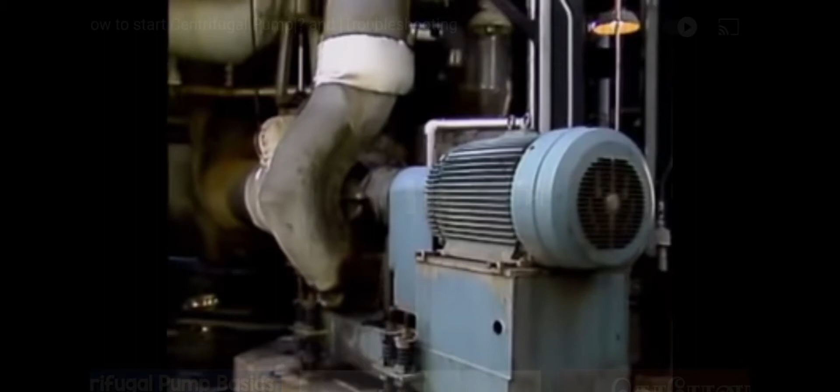Plants use many different types of pumps. One of the most common types of pumps that plants depend on is a centrifugal pump. Centrifugal pumps use centrifugal force to move process liquids.

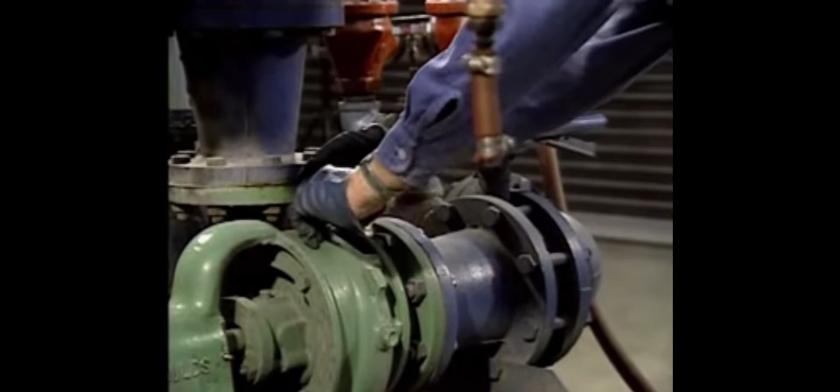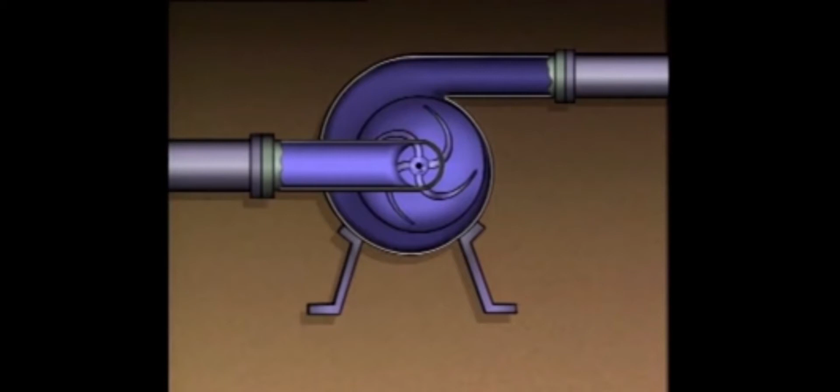One basic requirement that affects the operation of all centrifugal pumps, large or small, is that they must be primed. In other words, the pump casing and suction line must be completely filled with liquid before the pump is started. If a centrifugal pump isn't primed, it won't operate properly. Some centrifugal pumps stay filled with liquid when they're shut down. These pumps are often called self-priming pumps.

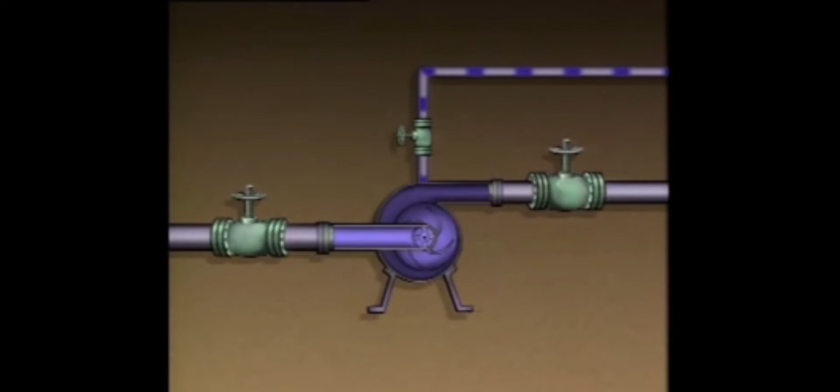A common way to prime a centrifugal pump is to open the pump suction valve and the vent valve. Opening these valves allows liquid to fill the pump and air to escape. In order for this to work, however, either the level of liquid to be pumped must be higher than the casing of the pump, or the suction pressure must be great enough to force the liquid into the pump. If the pump is handling a hazardous liquid, the casing vent should be piped to equipment that will prevent the escape of hazardous liquids. If the liquid level is below the pump casing or the suction pressure is too low, a variety of devices can be used to prime the pump.

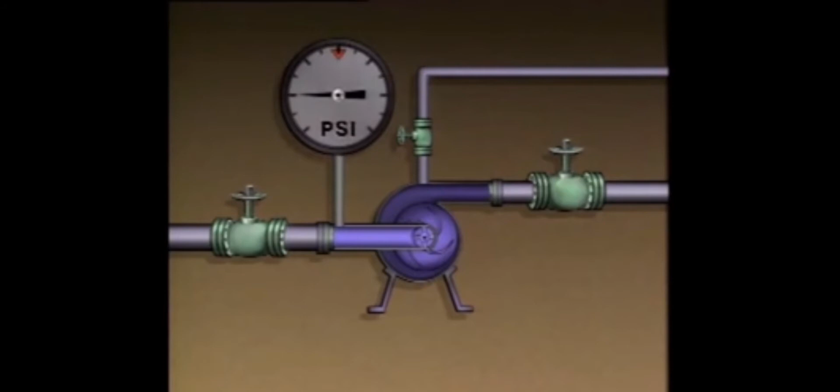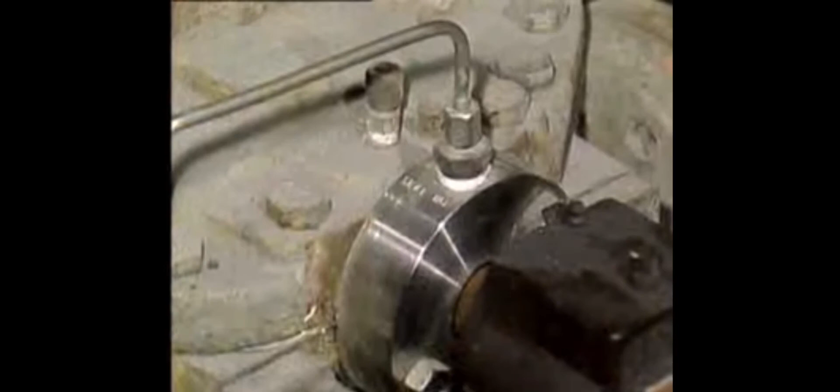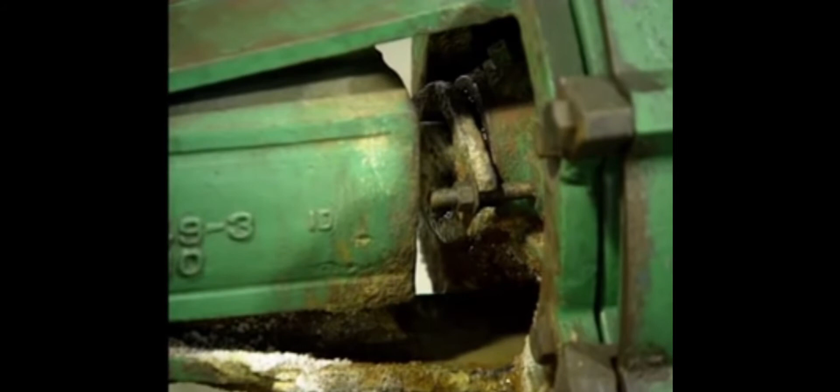On most pumps, the point where the pump shaft leaves the casing is a place where leakage can occur. To prevent process liquid from being lost or contaminated, either packing or a mechanical seal is often used to seal this area. When packing is used, operators should check to make sure that there is a small amount of leak-off to lubricate and cool the packing.

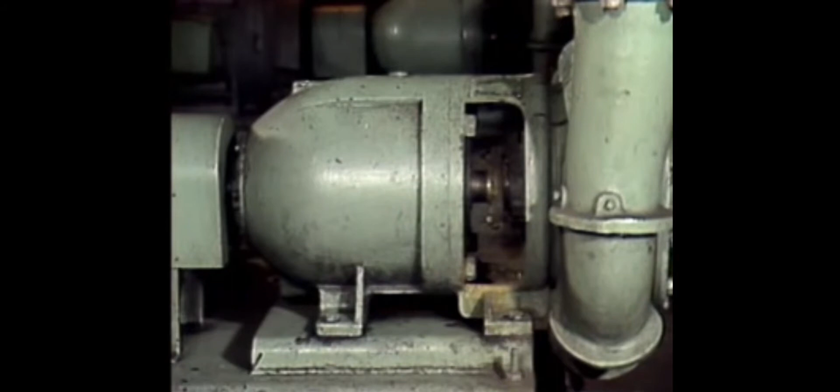If there's too little leak-off, the packing can dry out and burn. If the packing dries out, the pump should be shut down so that the packing can be replaced. On the other hand, if there's too much leak-off, the efficiency of the pump may be affected. To control the leak-off, the packing must be tightened. This should be done by tightening the nuts on the packing gland one flat at a time.

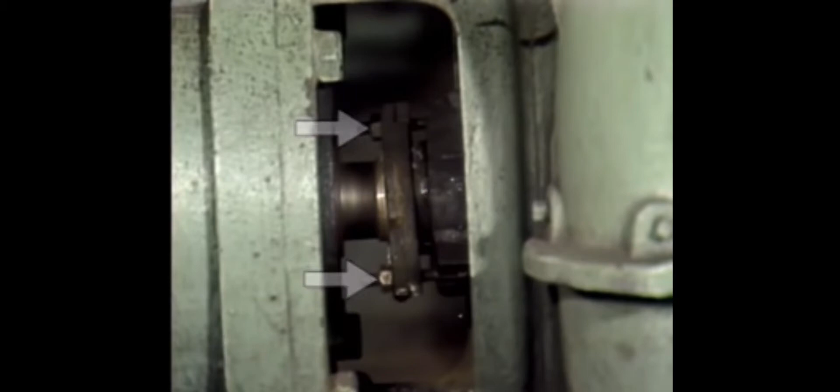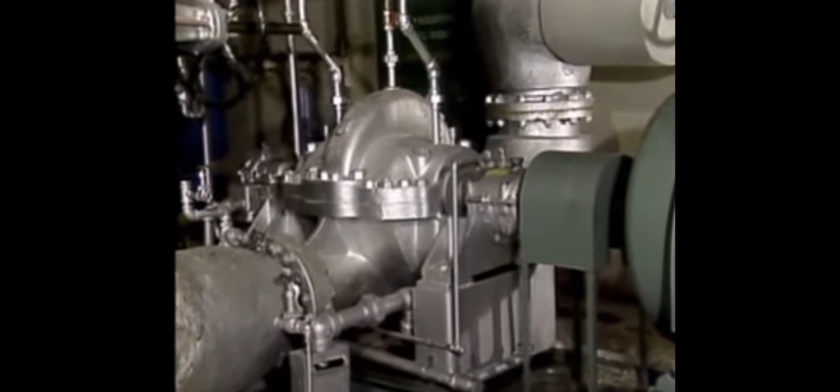For example, during startups, the casing and suction piping may have to be vented. If a sufficient amount of air remains trapped, the pump will not operate properly. Another way that air can get into the casing is through a leak. The suction of a centrifugal pump is normally at a low pressure, and this low pressure could draw air into the pump through leaks or the packing.

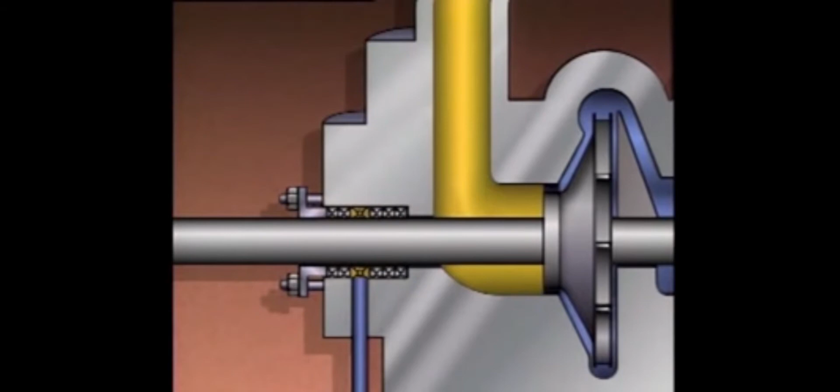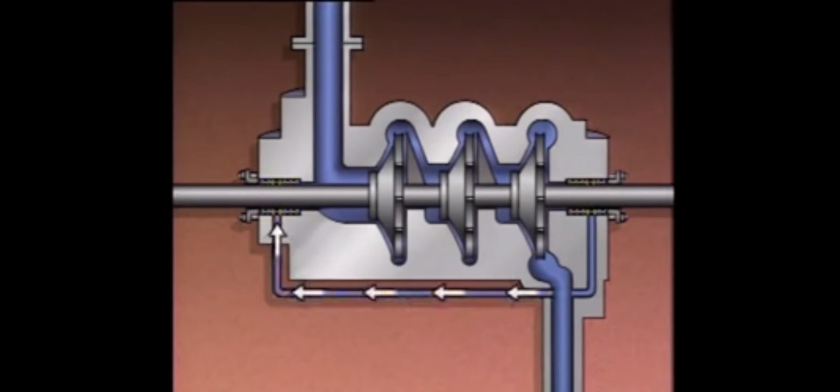On some pumps, the packing is exposed to the same low pressure that exists at the pump suction. On these pumps, the packing is often supplied with liquid from the discharge of the pump. This liquid cools and helps seal the packing. If the flow of liquid to the packing is not adequate, air could be drawn in through the packing.

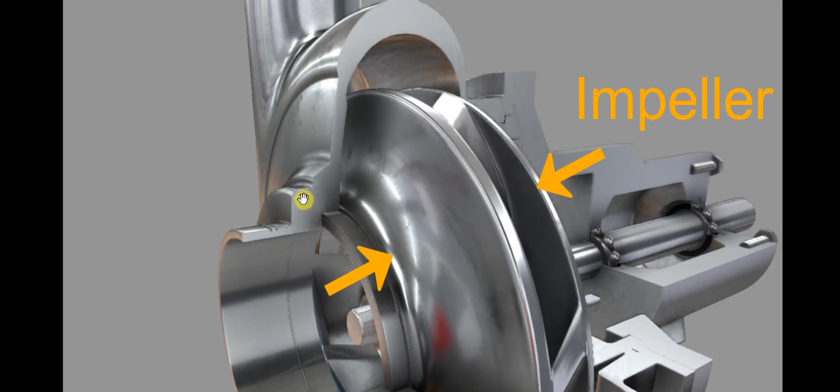On this side, we've got a cross section. Now, I'm not going to go through the terminology and the components because we've covered that in another video, but let's just go through the components that we actually need to talk about. And the components are the impeller and the volute casing.

So how is it that the centrifugal pump works? You can see from the design and the animation that the pump's construction is quite simple. Essentially, we've got an impeller rotating within a volute casing, and as it rotates through the liquid, we're creating pressure, and this pressure differential, that is the difference between the suction side of the pump and the discharge side of the pump, is what causes the liquid to flow.

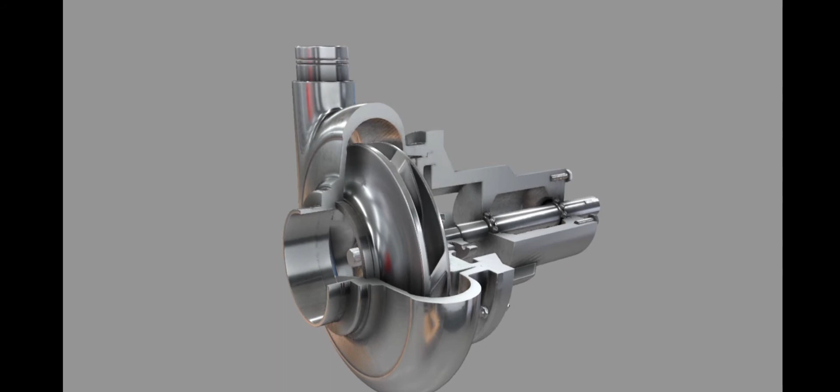Well, in order to understand how the centrifugal pump works, we need to have a very quick look at some of the theory. So let's first pull up an open centrifugal pump impeller.

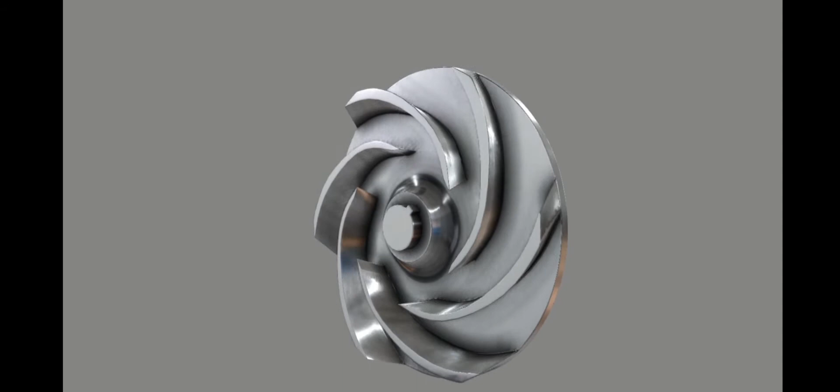As you can see, it is rotating in a clockwise direction. I'll give it a little spin. We can see there's a shaft in the middle of the impeller and a shaft key which connects the shaft to the impeller itself. The suction side of the impeller is this middle area here, that's what we call the eye of the impeller.

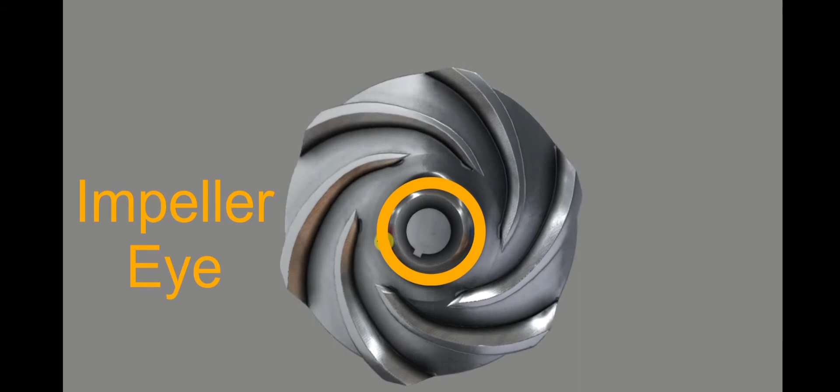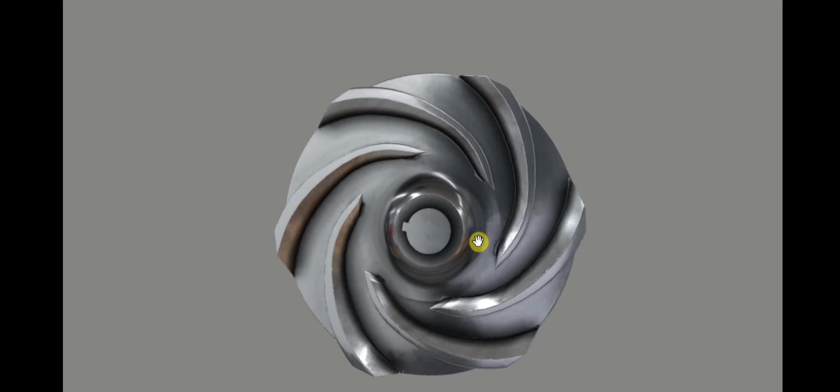As we draw the liquid in, we're going to create a negative pressure at the eye of the impeller, and then we're going to throw the liquid outwards radially away from the center of the impeller towards the outer periphery of the impeller.

The reason the liquid is thrown outwards radially away from the center eye of the impeller is because of the friction between the impeller and the liquid. As the impeller moves, some of this movement is imparted onto the liquid, and because the impeller is rotating from a center axis, the liquid has a tendency to be thrown outwards away from the eye of the impeller. The force that causes this is known as centrifugal force, and because this type of pump uses centrifugal force, it's called a centrifugal pump.

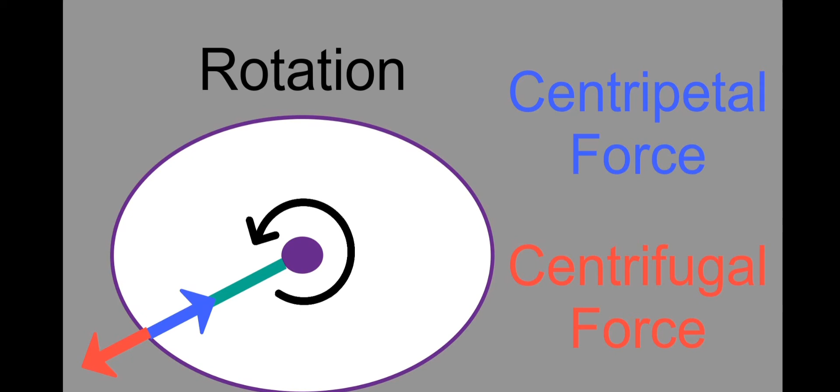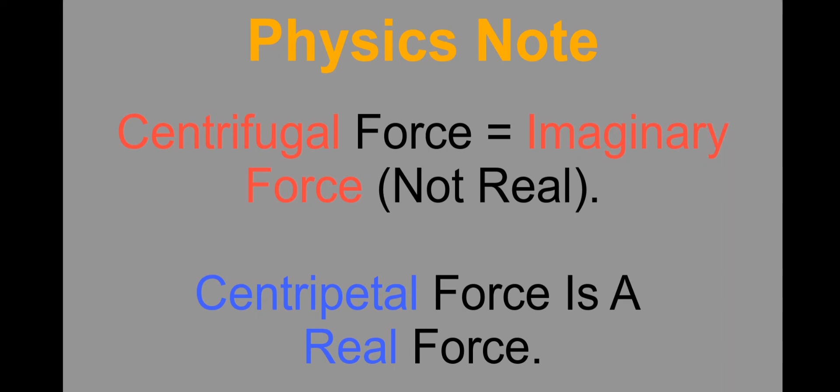If you've ever driven around a corner very fast in your car, you'll know that if you're turning into the left, you have a tendency to be thrown outwards to the right, and this is centrifugal force. The impeller does the same job, although on a much smaller scale. It rotates very fast from a center axis of rotation, and the liquid drawn into the center is thrown outwards to the side, radially away from the eye of the impeller. This centrifugal force gives us a large increase in velocity, which we can later turn into pressure.

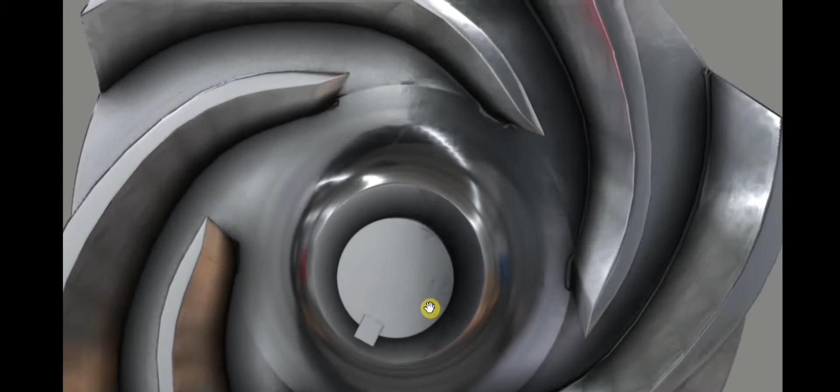So let's pause the animation and I can show you the flow path of the liquid. The animation is now paused. Zoom in. Let's just do it as the liquid would flow. It would flow into the middle like so. The liquid is then thrown outwards radially, and it's going to go between a pair of vanes, and then it's going to flow up along here. It's going to be thrown outwards, and then it's going to leave the impeller.

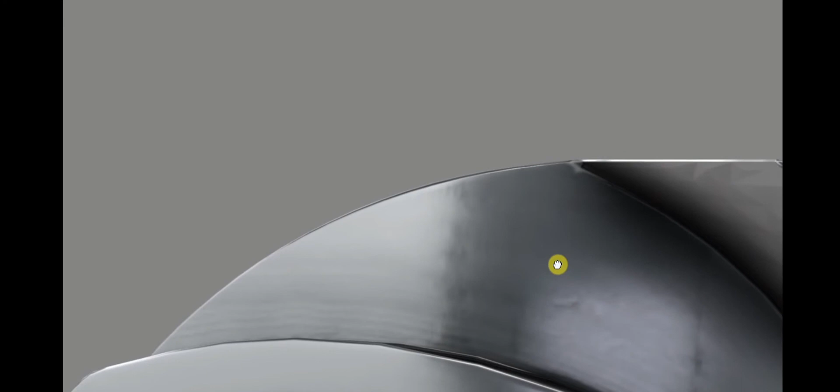Let's do it this time, but we'll just add some arrows to mark the flow. As you can see, the liquid would flow out radially, and as it flows out through the channels, the flow path area is going to gradually increase, into a diffuser. The concept behind the design of the volute casing and diffuser is the same as for the impeller. We know that we need to increase the flow path area in order to increase the pressure.

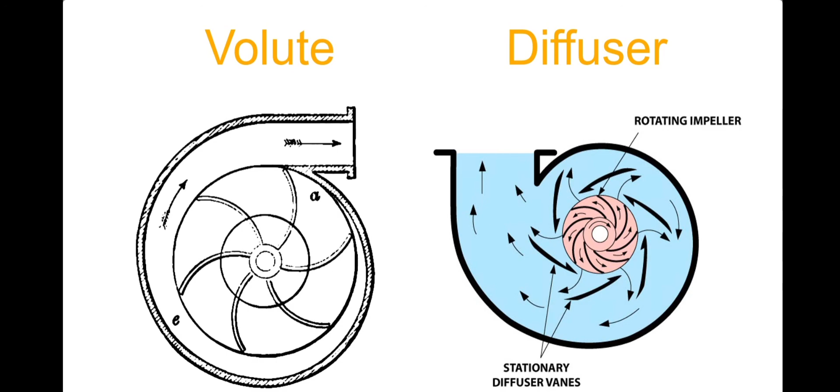As you can see on the diagram now, the volute casing does just that. As the liquid is discharged from the impeller, it's going to flow around the volute casing, and we're going to get a reduction in velocity and an increase in pressure. And that is essentially how a centrifugal pump works. There really is nothing more.